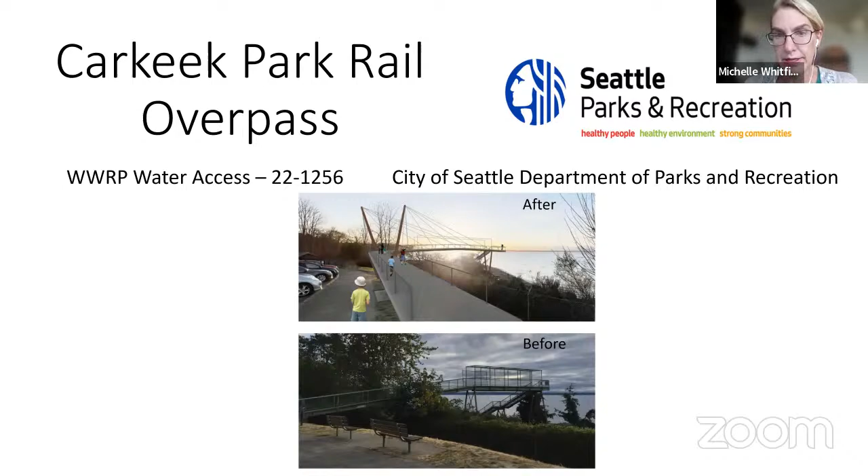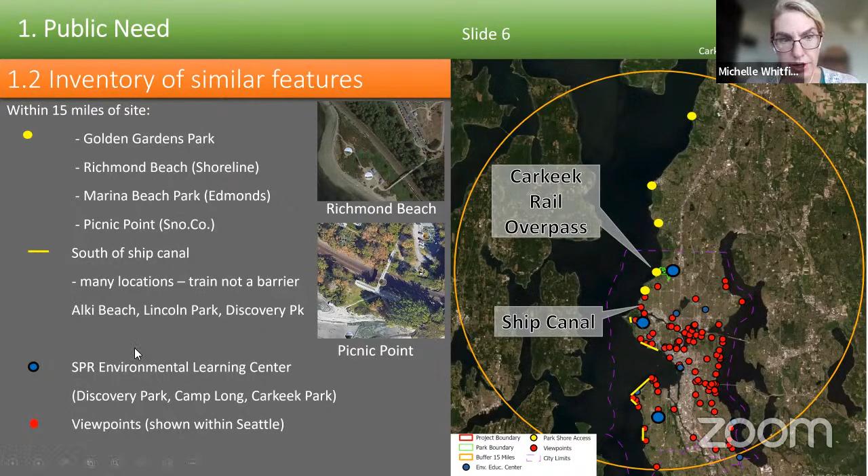In short, there are no other water access points that can compare to this location for the unique learning experience. Within 15 miles of the site, north of the Ship Canal, it is very rare to find water access because of the train, and only 4 locations are available. They're shown here, and there are 2 locations that provide water access with a pedestrian bridge, Richmond Beach and Picnic Point. Since the train is only a barrier to the north, there's more beach access to the south, and viewpoints and learning centers are also shown on this map in blue and red.

Because of its 330-foot width at low tide, the beach at Carkeek Park is wider and higher quality compared to the other safe access locations north. At low tide, an additional 20 acres of tide pools are exposed, and the beach is 1.5 miles long. Kids come here for education and environmental learning through many programs.

This is not a comprehensive list, but among the activities are school programs, which include 480 youth from Title I low-income schools. The park and water access are not in underserved communities, but we believe this park is still worthy of generous RCO support, because while wealthier families can afford to take their children on visits to parks and to see salmon, a good chance for more at-risk children to have the same opportunity is through school programs such as the ones in place here at Carkeek Park. Close into the site, the census tract does have higher income and lower residents of color.

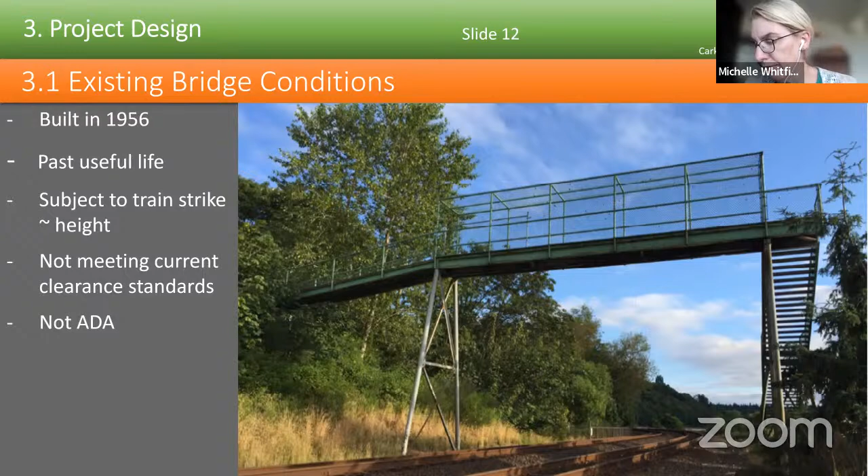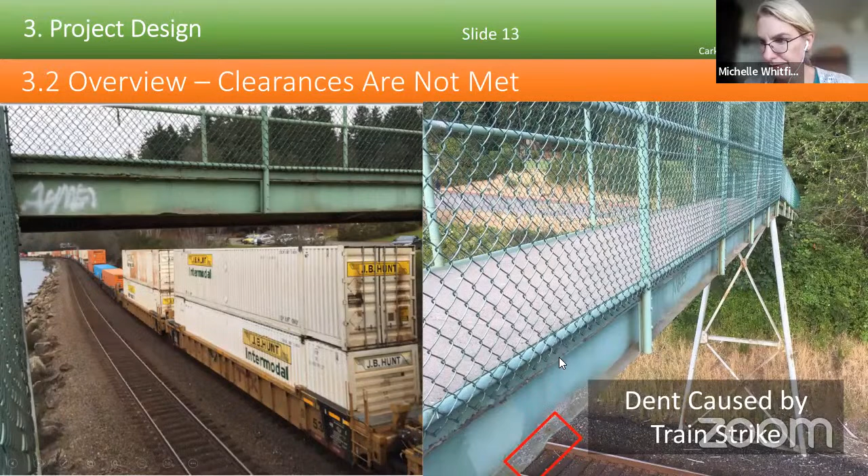Leaking has caused corrosion in many areas of the bridge.

The cable-stayed bridge style was selected for low maintenance costs as compared to the cost of maintaining the existing bridge, in part because the supports will be far enough from the train that they can more easily be serviced. It has a long expected life of 75 years, is cost-effective and fast to construct, and this style bridge allows for a main support to be on the land side, where the land is more stable than the beach side. The open design preserves views of the train and the water.

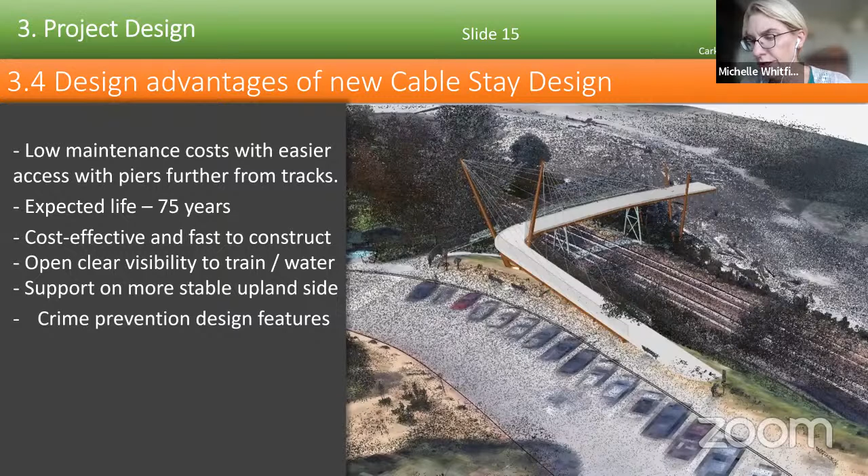The design includes new landscaping and an interpretive plaza. The bridge provides water access to the beach with educational activities: beach combing, swimming, salmon viewing, and counting. The wider bridge will allow the transport of small watercraft.

So once again, to reiterate, without this bridge, there would no longer be a safe connection to the beach and the beach activities.

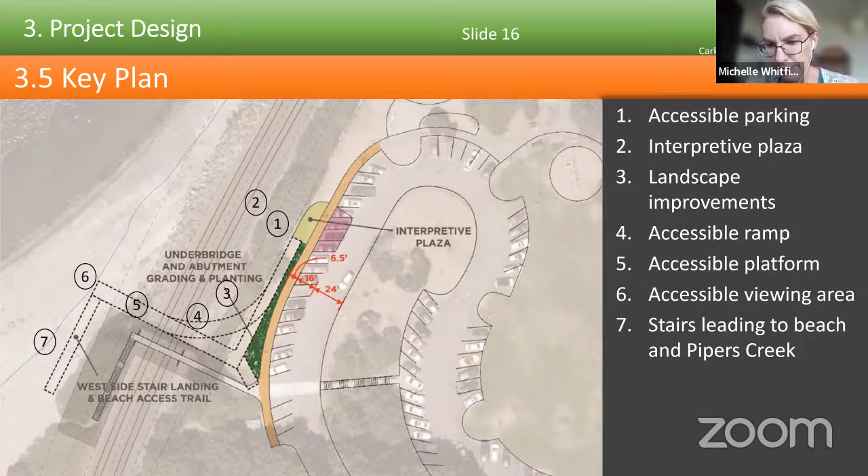The design includes an approach ramp that will be made wider with an accessible slope. The existing bridge, shown to the left, is very steep and not accessible.

The popular landing at the water side is crowded and inaccessible, and will be improved with a designated accessible viewing platform. We studied the possibility of adding a ramp or an elevator to the beach here, but the ramp would have been too long and an elevator would not have been supported by the soils.

The rails are on property owned by BNSF, and an existing easement expires when the current bridge is no longer used, so we will renegotiate the easement from their boilerplate. We've confirmed that BNSF has received our 10% plans, and we have their next steps.

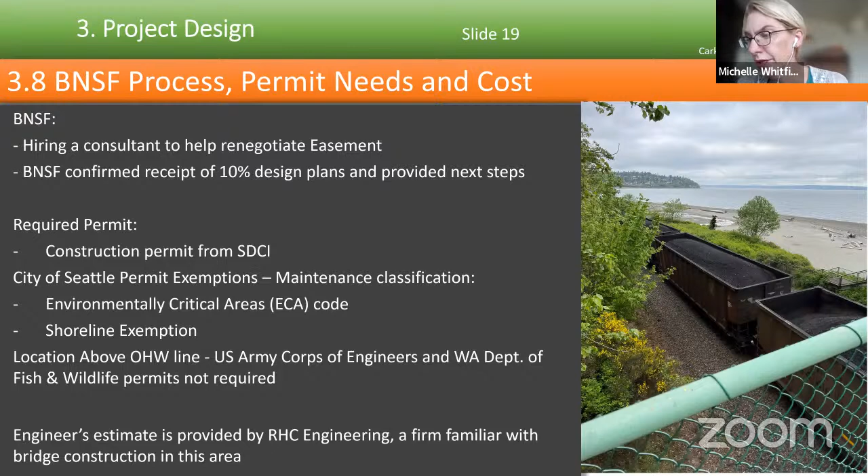On advice from Snohomish County, we are advertising for an experienced consultant to lead the negotiations and advise our property team. Because this is a maintenance project to replace the bridge, we expect to be exempt from shoreline and city environmentally critical areas code. Work will be above the ordinary high water line, so no Army Corps or DFW permits, only a construction permit will be required. The engineer's estimate is provided by RHC Engineering, a firm familiar with bridge construction in this area.

Number 4, sustainability, ecological factors. Stormwater will be managed with green stormwater infrastructure to ensure that no undue burden is placed on the aquatic system. New plantings will help improve air quality, and the area of impact is minimal.

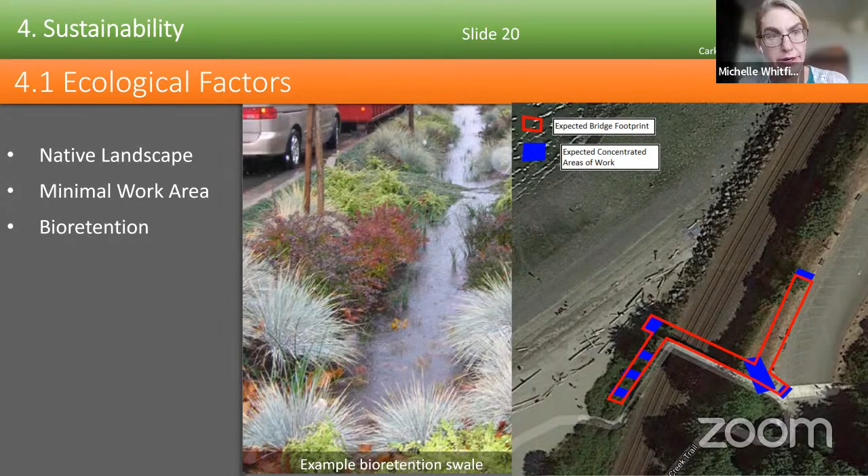Social factors: the site is connected by multiple modes of transportation. The educational experience of studying the salmon life cycle and being able to see the point of exit by crossing the bridge to get to the location where Carkeek Park meets Puget Sound reaches all public school kids once, during 4th or 5th grade, therefore making society as a whole more environmentally aware. This is through the Salmon in the Schools program.

Economic factors involve longer lifespan, lower maintenance costs. SPR is committed to long-term maintenance of the bridge in the form of resources, equipment, and staff. The Carkeek Park Advisory Council, along with several other local organizations, including Carkeek Stars, are among the groups that contribute thousands of volunteer hours to support this park.

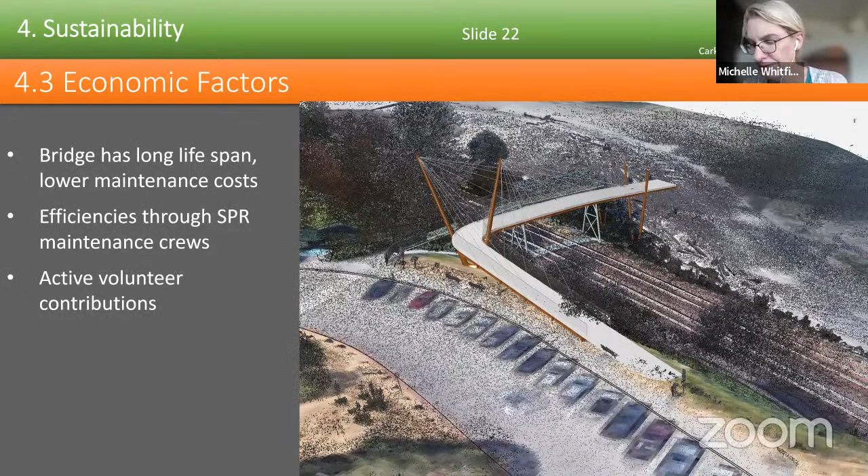Site suitability, number 5. The beach presents challenges for construction. High tides may get even higher with potential to intermittently submerge supports. The soil is soft, and the area is also subject to strikes by beach debris.

So this bridge design allows for a main footing on the land side to avoid the potential for beach settling by limiting the load on the beach side. The proposal conforms to BNSF design recommendations for vertical and lateral clearances.

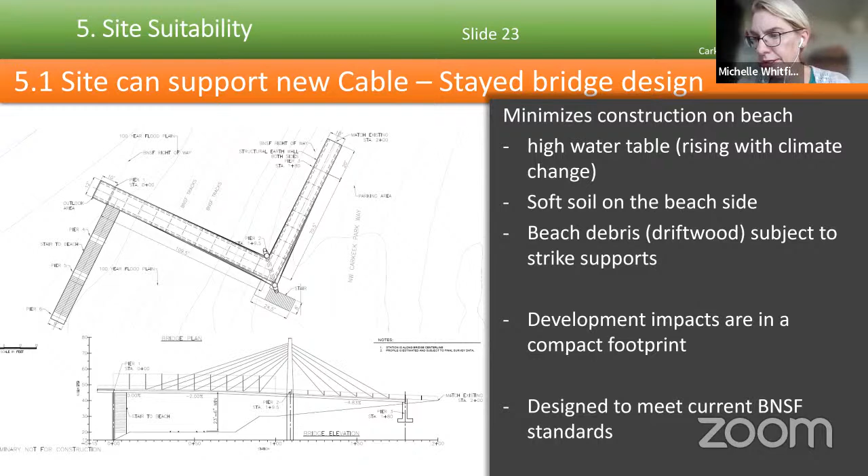And the recreation elements that this bridge provides are largely already in place and do not need to be reinitiated. This is the access to the beach that would go away without a safe crossing, which this bridge provides.

Expansion or renovation, number 6. The new bridge will provide expanded interpretive signage, more use of the beach for watercraft, expanded accessibility where there was none, and expanded clearances to meet BNSF standards.

Number 7, diversity of recreation uses. The project access to the beach provides viewing trains from the bridge, naturalist-led hikes, tide pool viewing, beach and salmon education, night hikes, small boat use, beachcombing, and picnicking. These are all activities that the bridge connects to the beach, so without this bridge, these activities would no longer be accessible from Carkeek Park safely.

Scheduled trips to the beach can have up to 150 people at one time, and the wider bridge will allow the water to be activated through small craft.

Number 8, project support. Many groups are currently working in this area and fully support continued beach access, as shown by the 8 letters of support that this project received. Future outreach will focus on aesthetic and interpretive aspects of the bridge.

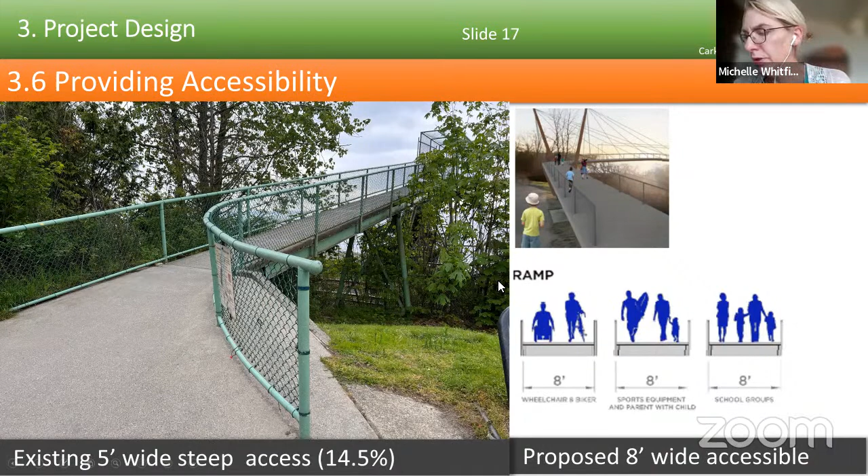The new bridge will have some new interpretive signage, so that's an expansion. There's more use of the beach for watercraft, it's assumed that the bridge will allow you to carry some small watercraft across, that's an expansion. The existing bridge is not accessible, so this one will be accessible up to the viewing platform. And there are expanded clearances to meet the BNSF standards, they'll be taller and the footings will be wider.

Okay great, I was busy with the other criteria when that went through. Yeah, quickly so, I kind of had to speed up a little bit. Oh my, apologies. No problem, thank you. Thank you, David.

And then Sarah, our last question. Michelle, Sarah at the City of Lynnwood. I'm actually interested in your cost efficiency. As you mentioned, you have volunteer efforts, but you didn't give any particulars. Do you have an existing volunteer program? Do you know how many hours a year and what it is that they work on?

Yes, I do. We have an existing volunteer program with Seattle Parks and Recreation, and over the course of every year, the volunteers contribute. I do have some statistics, I'm actually pulling that up. I don't know if we have enough time. It's churning.

If Mo's here, he might have that information right, I don't have it right in front of me. I know that they support over $1.5 million worth of support of our parks. We have thousands of people that volunteer, both in Carkeek because it is a destination park, but in other parks throughout the city. And so we have a very formal process where you can register for ongoing support to volunteer, or one-off projects, we'll often have like a trail maintenance project that somebody can register for. And then we have lots of ad hoc groups that aren't necessarily registered as volunteers, but they provide lots of volunteer support. This is a big park for that, in large part because of all the school programs that happen there. So we get lots of volunteer support that is not actually calculated here. Sorry, I don't have the exact numbers in front of me.

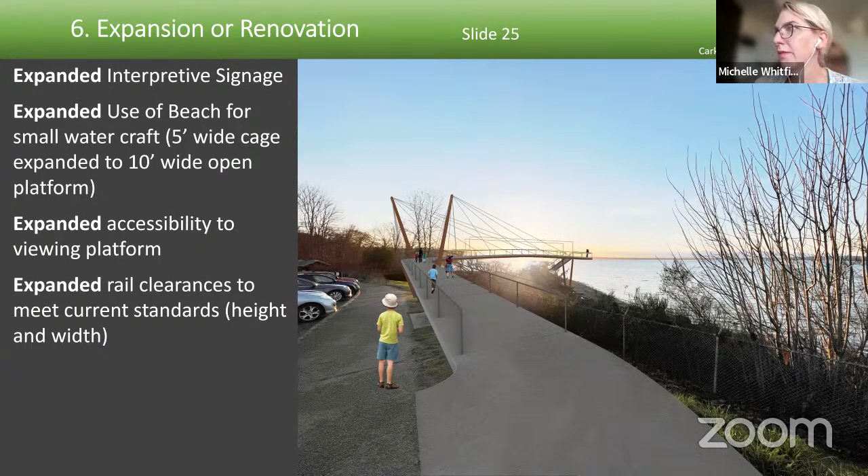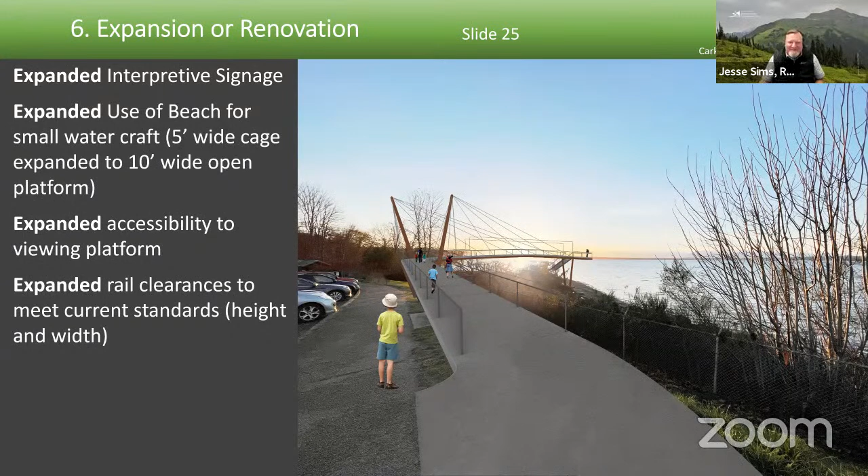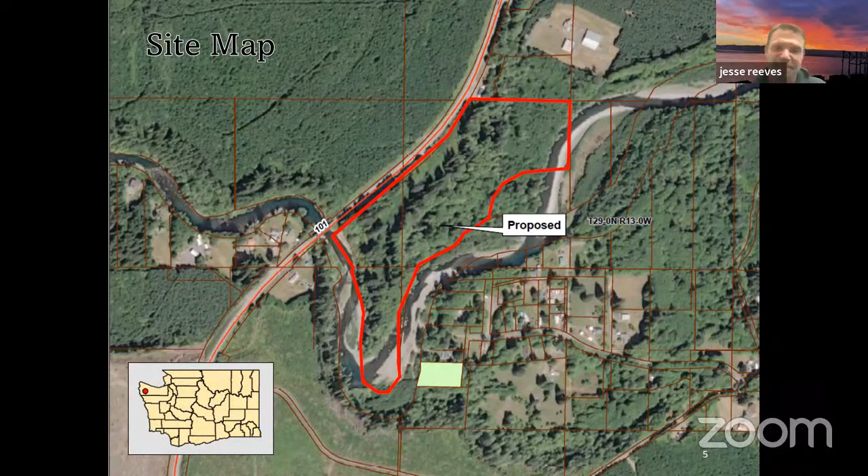This property not only lets people take out before there's some technical water which is not easily navigated by your average oarsmen, but also can be very difficult even for very experienced boaters. That same set of technical water is very popular amongst rafters, boaters, and whitewater enthusiasts. So this site is important for a couple of different reasons, not just for the fishing community, but for people who want to exit the river safely and people who want to enter the river just for what the river offers water-wise below this access.

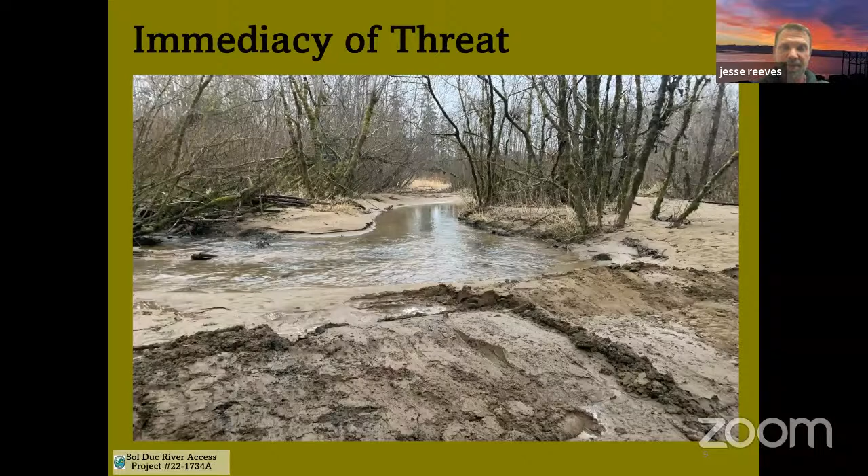Site suitability - this property is already ready for its intended use. There's paved access immediately off of Highway 101 to a maintained gravel road, which you can see. There's more than enough parking on the river bar and above to accommodate several vehicles, trucks, and trailers. There's over 1,000 feet of river bank access for numerous types of recreation aside from just fishing, but there's also no real need at this point for any type of infrastructure besides sign standards and a kiosk for information, maybe regulatory rules and such.

Portable restrooms would be brought in to accommodate those, and potentially a permanent restroom if that was determined to be needed in the future. This site also would fit right in with our current maintenance structure that exists in the area, with several sites in the immediate vicinity, so this would be easily maintained.

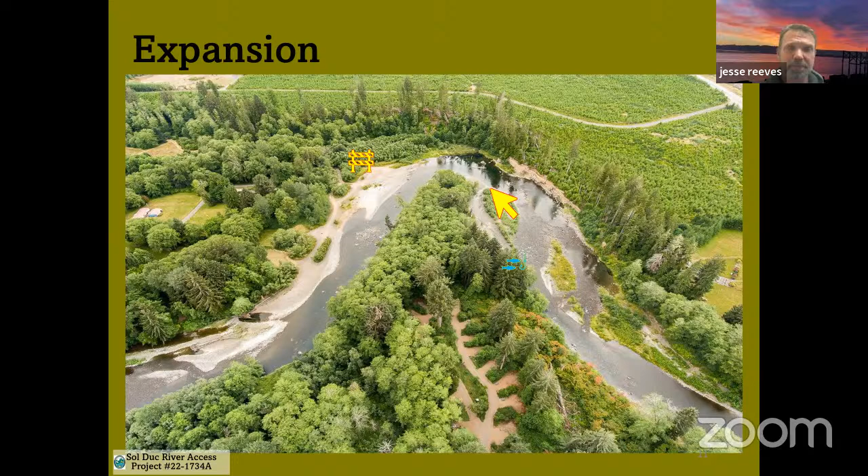We have a lot of support from the local communities, several fishing groups, the city of Forks, Clallam County, just to name a few. And we have several letters of support to add to those.

The cost efficiency of this property would be maintained by DFW's water access staff with infrastructure already in place. The operation and maintenance would be funded by Discover Pass revenue. The contribution of fishing dollars in this area is crucial - once again, this is in the 6th congressional district with over 87,000 anglers who spent over $152 million on fishing-related purchases in Washington state in 2018.

The mentioned property could provide a variety of opportunities for recreation, but also the community as a whole, and WDFW and other agencies for research, and just based on its location and what the property has to add with no additional cost. It's there and ready for use, but also ready to be used for other things aside from recreation.

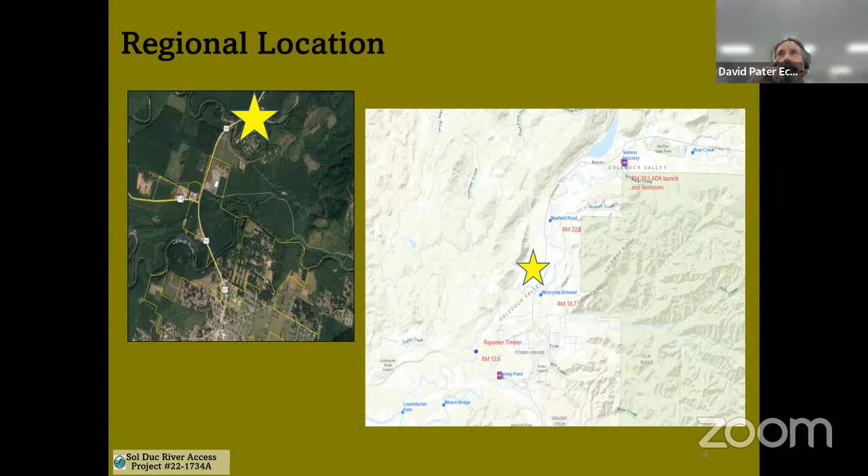I'd like to just get a little bit more information about the boat launch on the property. You showed a map earlier that pointed to a location. But that wasn't the one, I think it was further down. There should be two of them, and then in the very last slide it shows it again. Yeah, that might be it. There we go, you just passed it. There you go, no, new launch.

So this is real confusing to me. So the new launch is on the sort of peninsula of land. You're pointing, this arrow, but it looks like there's a side channel. I'm just not seeing how accessible it is, and maybe we're not seeing everything from this aerial, obviously.

To the right of the peninsula, on the opposite bank of the river, you see the opening that's there. It's not really a side channel, that's a gravel bar. But the actual launch is at the very tip of that peninsula, right at the end of that gravel bar.

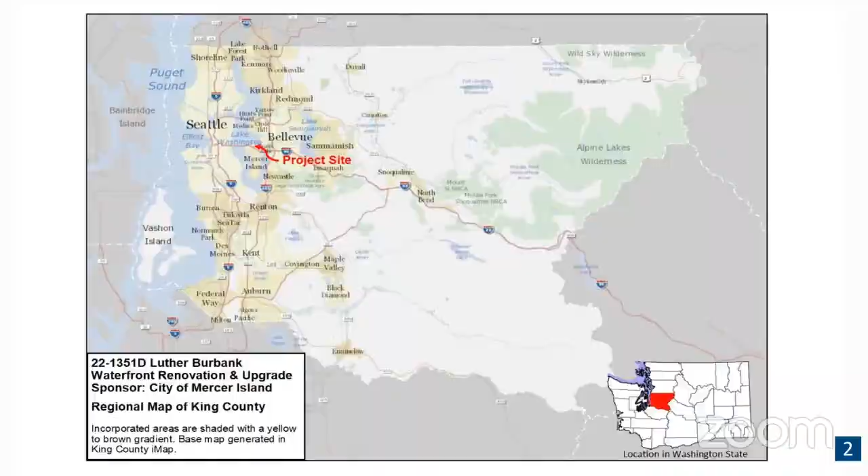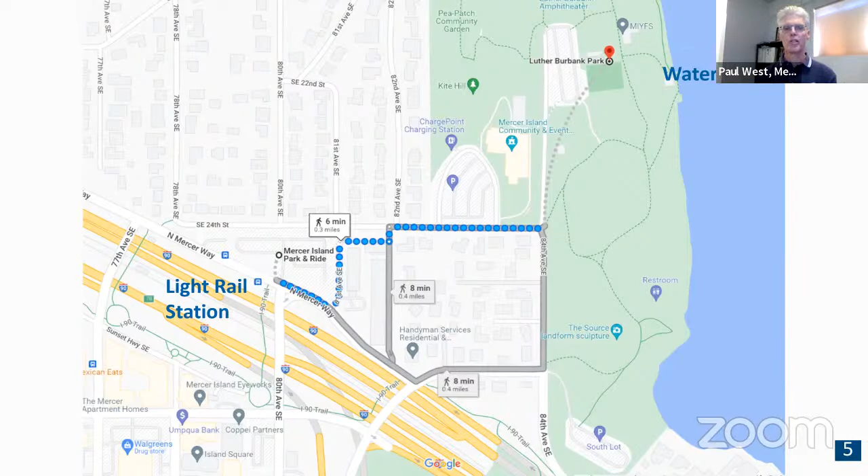The city of Mercer Island is within Lake Washington, King County. Our project is within Luther Burbank Park on the north end of Mercer Island. The site is located just off I-90 between Seattle and Bellevue. The project is on the shoreline of Lake Washington. The current boating facility was developed in 1974. It includes fixed pier docks, a pedestrian plaza, a storage building, and a historic steam plant and restrooms. This project is a 7-minute walk from a Sound Transit light rail station. Starting in 2024, this project will cover a service area containing 2.9 million people. The facility is 50 years old. Rot has overtaken the docks, and the plaza paving is failing.

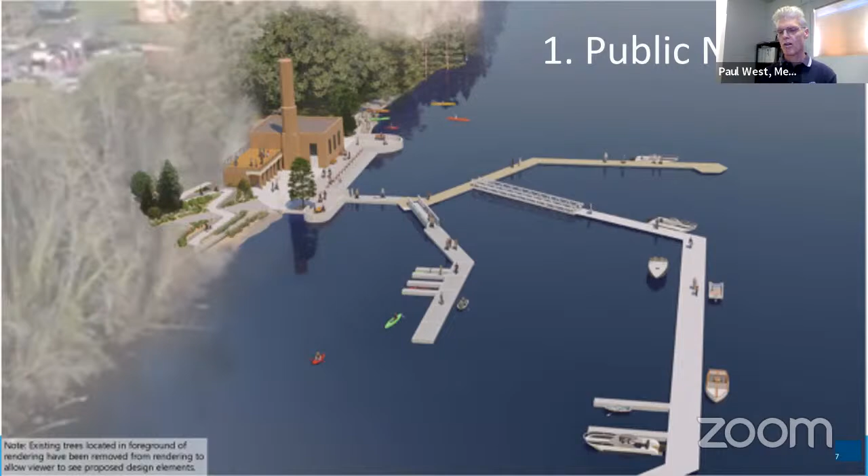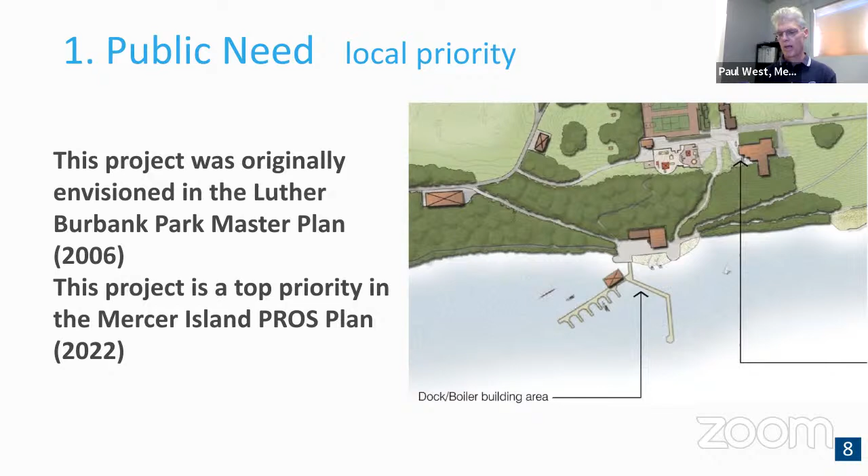Criteria 1 is public need. This project will create a gathering space for multi-use aquatic recreation. While there are many water access points on Lake Washington, there are few locations that bring together the range of desires for shoreline access. This project gives everyone from die-hard boaters to those who literally just want to get their feet wet a way to participate. This project was originally envisioned in the 2006 Luther Burbank Park Master Plan. The project is a top priority in the 2022 Mercer Island PROS Plan. The design of this project achieves SCORP priorities for equity, youth, and sustaining our legacy.

This program hits on 4 of the 6 recommendations of the state boating programs plan. In our 2018 demand study, it showed the expected growth in small boat use would not be met by the fixed pier docks. Then the pandemic hit. Paddle sport growth has been estimated at 30 to 40% since then.

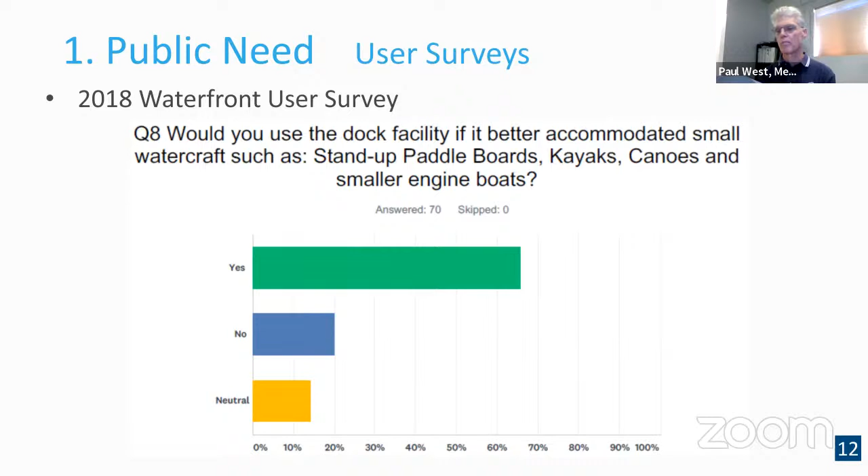Our waterfront user survey found that 65% of respondents said they would use the docks if they better served small boats. In 2020, we conducted a 5-week design open house and presented 3 design alternatives. We received 131 survey responses that showed people wanted more facilities and services for paddlecraft. Our youth boating programs at the site are the most popular summer camps we offer.

Lake Washington has many water access points, but relatively few comparable multi-use sites that could appeal to a broad audience of boaters and non-boaters. We identified 4. We asked: is the site attractive to non-boaters? Are there other things to do in the park? Is it accessible by transit? Is it usable by all classes of boats? Asking these questions, we found that only Gene Coulon Park was comparable to the project we are proposing.

Luther Burbank Park is a regional park. Bellevue College conducted a statistical survey that supports this assertion. It found that 60% of park users were not from Mercer Island. Most park users come on the interstate highways, and in 2024, light rail will be another option. We anticipate an increase in park usage once it opens.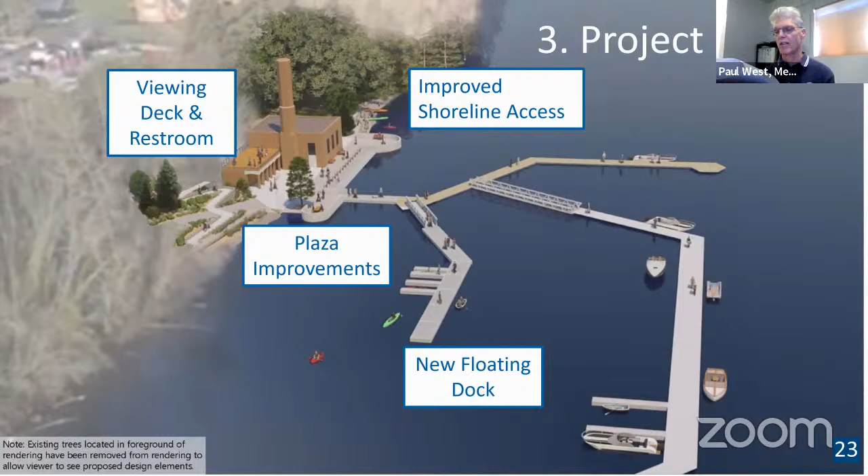Project design. This slide is a rendering of what the new facility would look like. This project would build a new floating dock for non-motorized boats, improve shoreline access with an expanded beach and overwater platform, and provide additional water access with plaza improvements and a new viewing platform on top of the restroom annex. This project is part of a larger comprehensive initiative for the entire waterfront area. The related projects are the small powerboat dock, the large powerboat pier, and the steam plant stabilization.

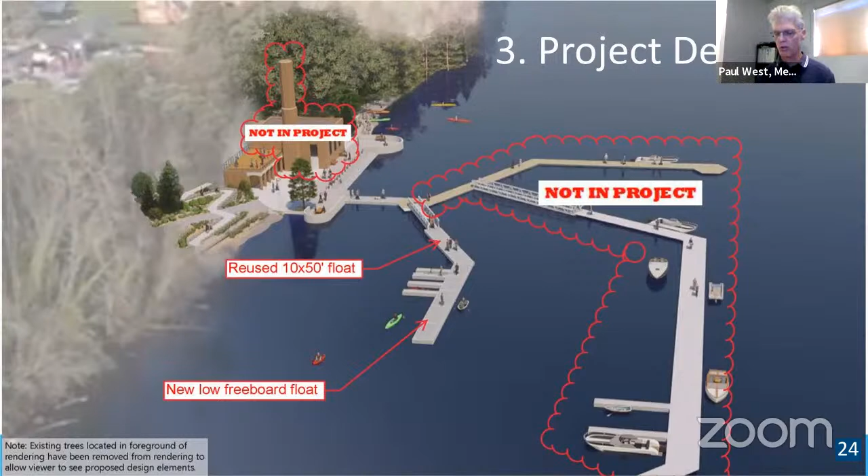We have given particular attention to designing these features to separate various boating and non-boating uses to reduce user conflicts. The viewing deck, overwater platform, and non-motorized dock provide new recreational experiences. The non-motorized dock will replace a fixed pier. It will reuse an existing float and add a new low freeboard float for paddlecraft. Finger docks will help paddlers load and unload. The outer dock provides wave attenuation.

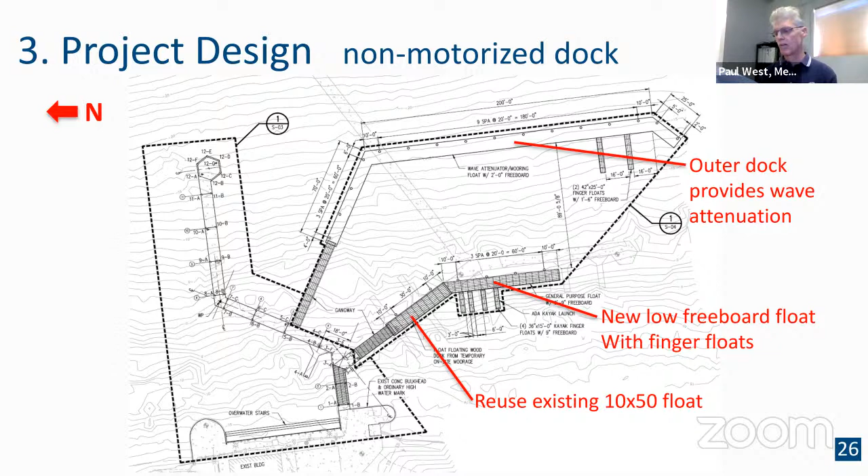Lake Washington has changed in the last 10 years with the advent of wake surfing boats. The large wakes these boats generate create a hazard for people using small craft. This wave attenuation dock addresses this.

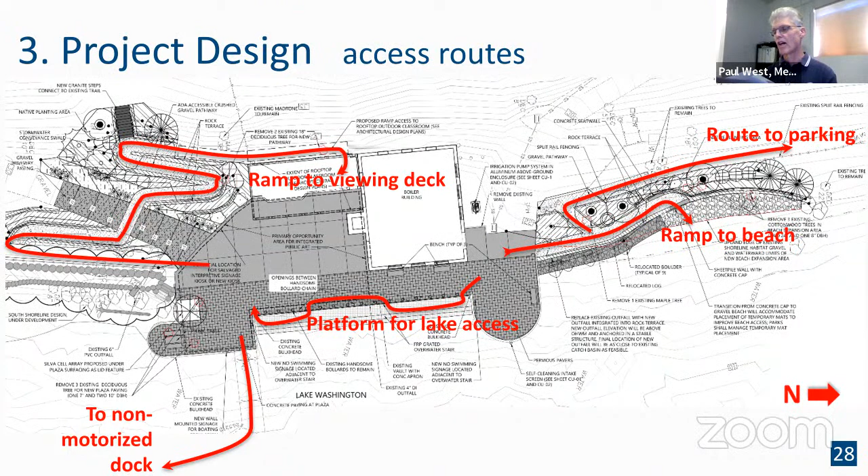The project routes create 4 new ADA accessible elements: the viewing deck, the overwater platform, the non-motorized dock, and the cobble beach. The non-motorized dock will also feature an easy launch ramp for users who prefer to enter their boat before it is floating.

Underlying all these improvements will be a drainage system that protects the improvements. The original facility did not have a drainage system. The plaza paving and restroom annex have suffered water damage as a result. This system will install drain lines to support the new improvements. It will capture runoff from the plaza in permeable pavers and conduct it through a biofiltration system before it goes into Lake Washington. With this, the plaza hardscape provides some of the benefits of a naturally vegetated shoreline.

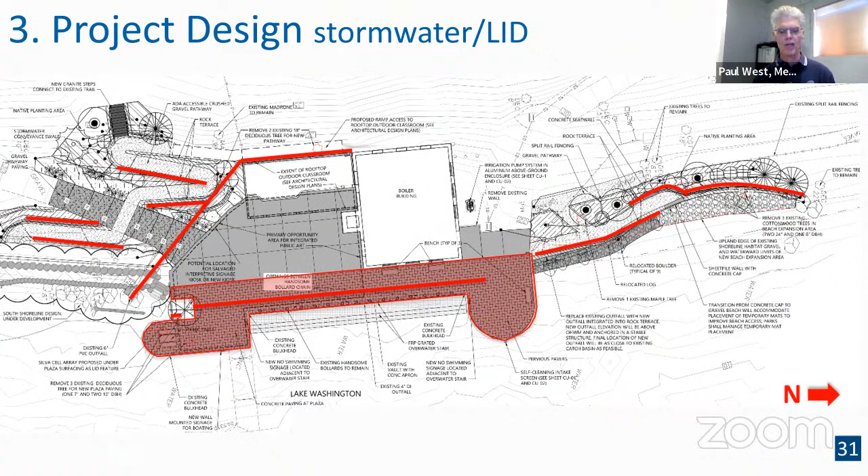An element unique to this project is the proposed overwater platform. Current use of the site demonstrates the strong demand for this type of recreation. There would be a 4-foot wide platform and 2 risers attached to the bulkhead. The bottom step would be just above ordinary high water, which would allow waves to flow across it. This will allow people to dip their feet into the water during summer months. This feature promises to be a gathering spot for everyone, especially those less comfortable with getting into the water, giving them a way to interact with the lake.

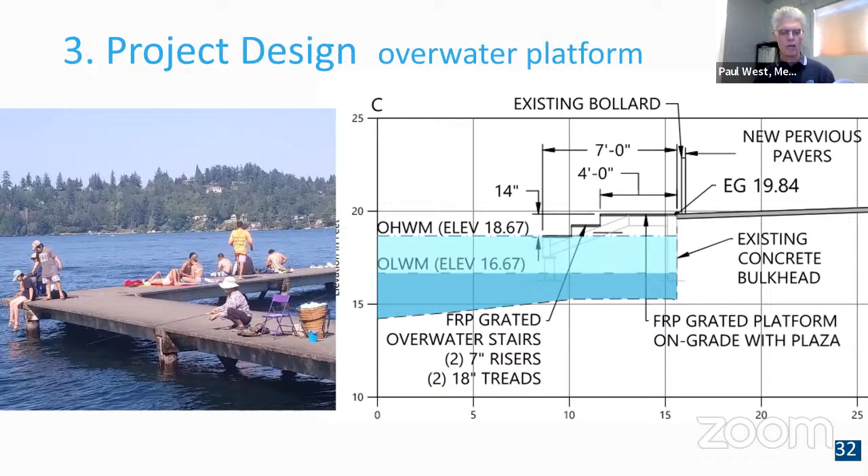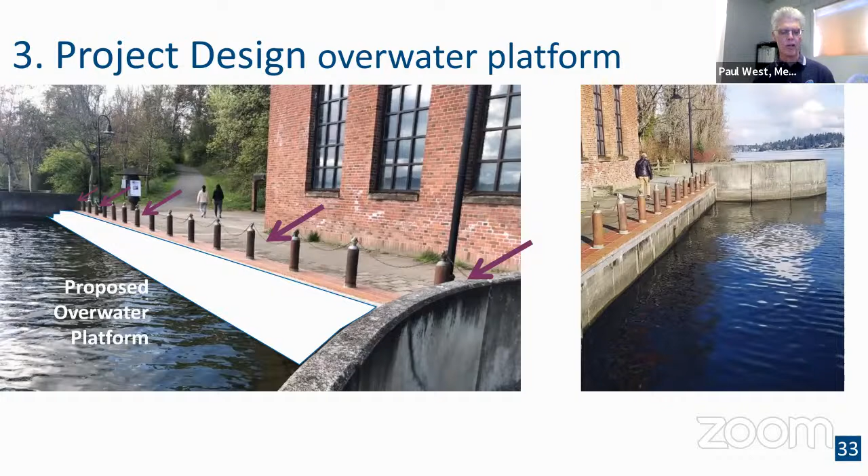Because the overwater platform is a unique feature, we are having the design reviewed for safety and usability by a qualified aquatic recreation consultant. A new viewing deck on top of the existing restrooms would provide views of waterfront activity and be a place for boating classes to gather away from the plaza traffic. Seating would be flexible based on seasonal need. This project includes renovations of the restrooms, plaza, and cobble beach.

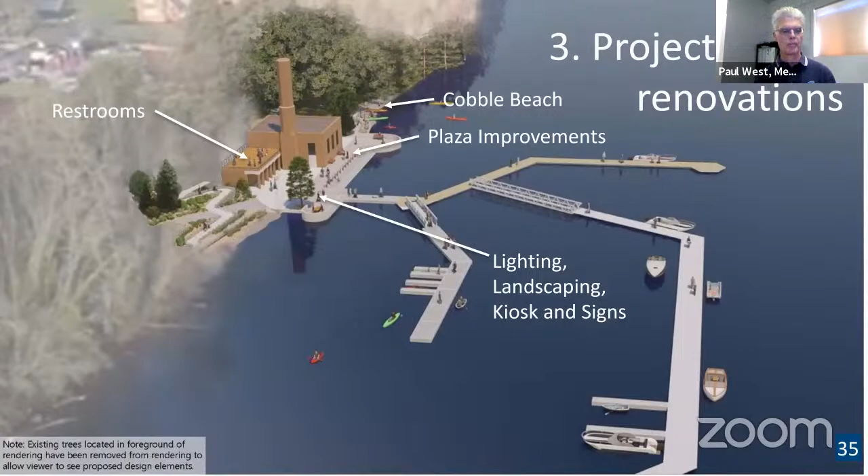The existing cobble beach will be widened. Currently, it is only 5 feet wide during the summer high water period. Widening it would give pedestrians a place to access water and paddlers a place to land.

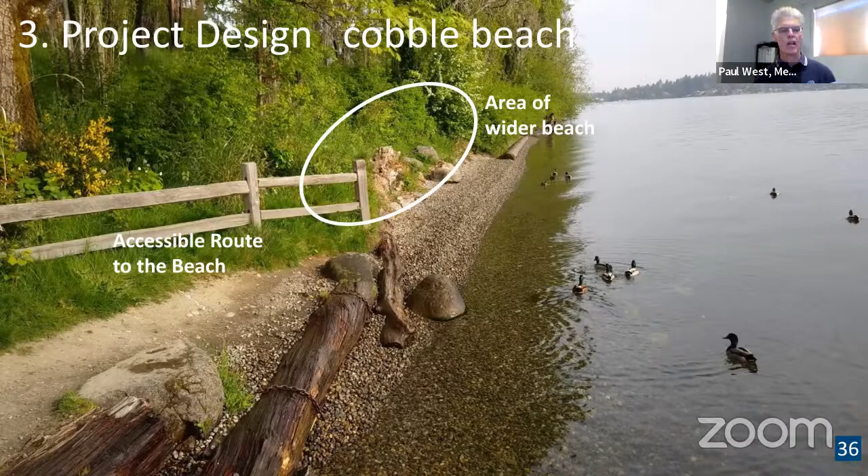Sustainability. The overwater stairs impact the nearshore environment even with grated decking. You can see the lake bottom in this reach has been heavily disturbed. It is expected that migratory fish stay offshore in this reach. The overwater coverage in this reach has less impact on fish habitat.

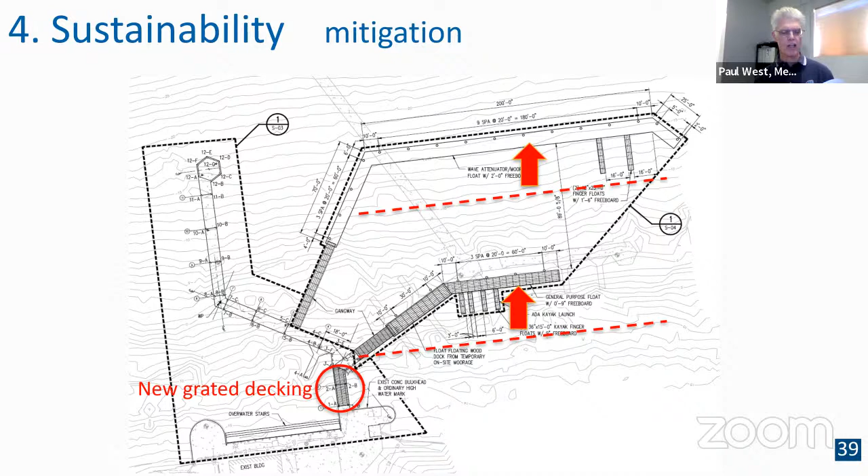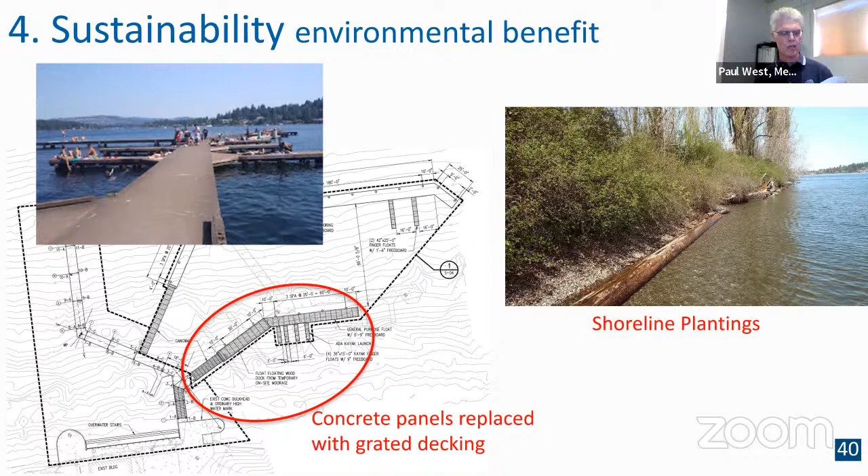Based on regulatory agency review, the docks have been moved further offshore and the closest section will get grated decking. The critical areas study has determined that there is no net loss of biological function from this project. The non-motorized dock will replace the existing concrete deck with a grated deck. Shoreline plantings will provide shade and terrestrial habitat.

This project removes 74 creosote pilings and replaces them with 29 steel pilings.

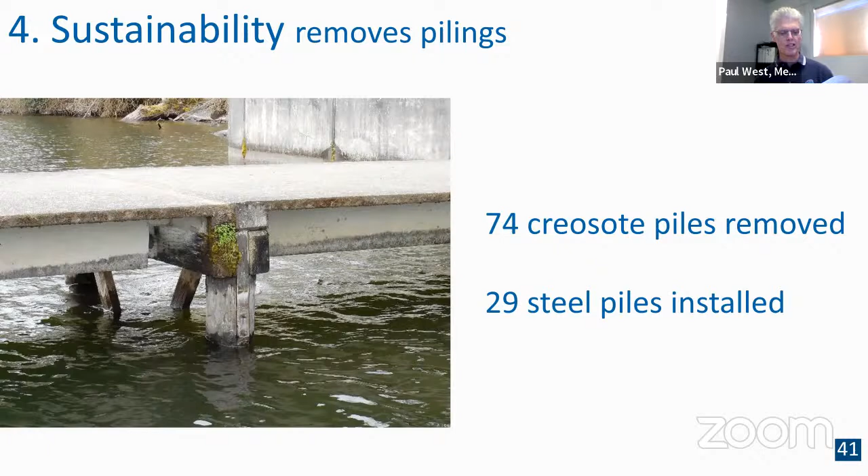Throughout this project, our programs and posted materials will foster public awareness of the aquatic lands and water quality, especially through our youth programs. This project includes low-impact development features.

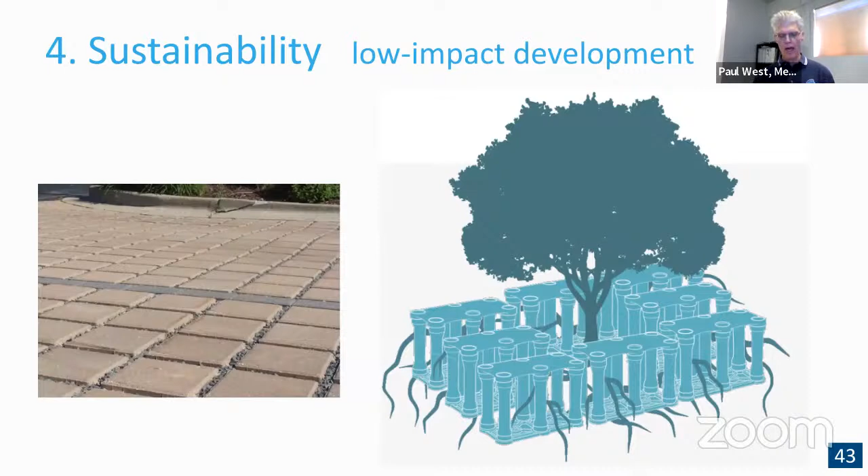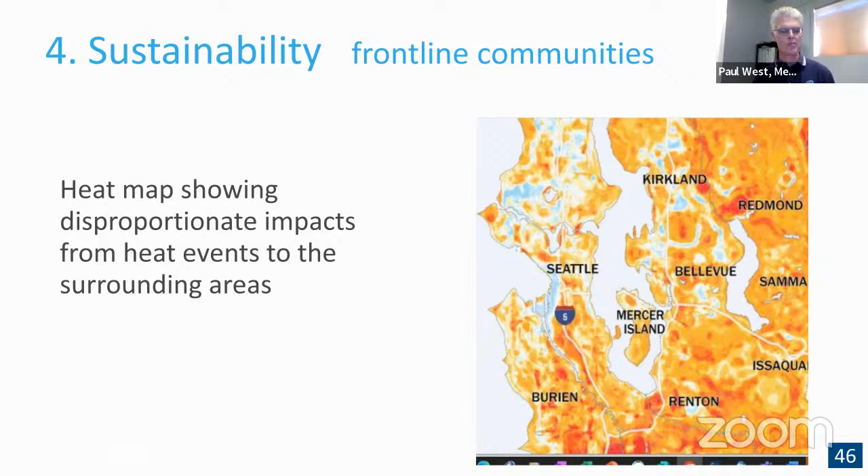This project will be accessible by light rail. The site is next to the Mountains to Sound Regional Trail. Water access at this site provides a cooling environment that is accessible to frontline communities affected by climate extremes.

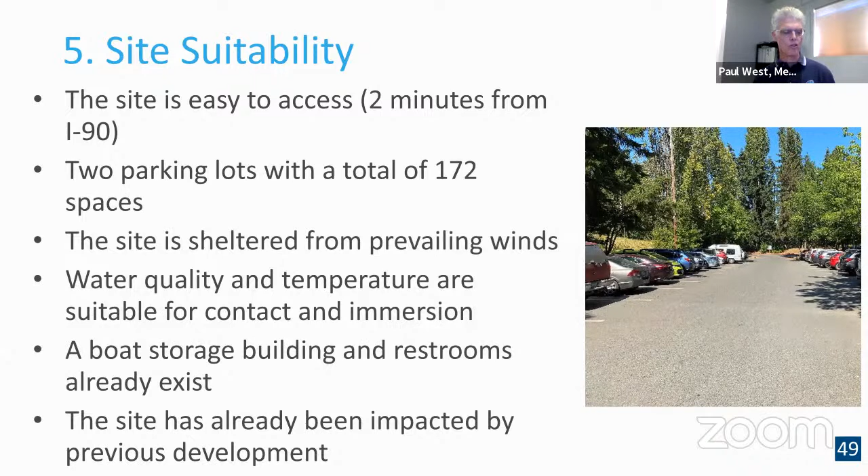The site is easy to access by car or transit. The site is sheltered from prevailing winds. Water quality and temperature are suitable for contact and immersion. Boating facilities already exist here.

Expansion. This project expands an existing facility. It provides over 3,100 square feet of new facilities that do not currently exist. In addition, it provides 365 linear feet of new access routes.

Diversity of recreational uses. The city's comprehensive waterfront initiative will provide for a range of water-based uses. Boaters and non-boaters have a place here. That project connects to a 55-acre park with many additional recreation options in the park, such as picnicking, playgrounds, tennis, pickleball, dog run, amphitheater, swim beach, and miles of trails.

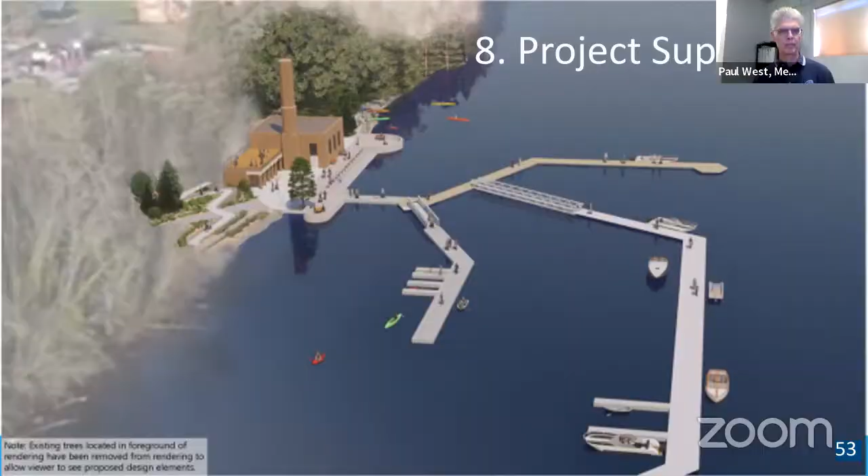Project support. The project has been engaging the public in scoping and design since 2018. The project has maintained an interactive web page where people can find project information and provide input at any time.

Starting in 2020, the city ran a 2-year campaign of public engagement in the design process, culminating in the city council approving a 30% design in March of 2022. This project has received support letters from 12 organizations and individuals.

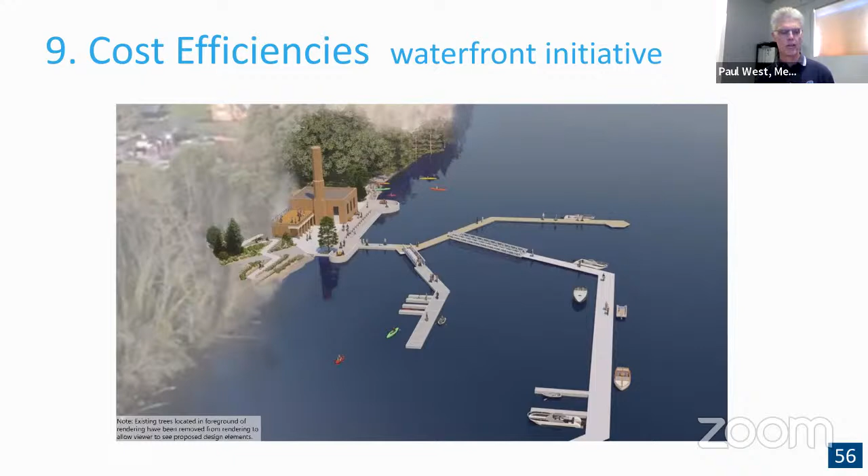Cost efficiencies. This project is part of the city's comprehensive waterfront initiative. There are economies of scale in redoing the entire site as a single project. The 3 major renovation elements in the project are cost efficiencies over building new facilities.

We are reusing an existing float which saves money and reduces waste. The Waterfront Initiative has secured 4 grants to date. It may receive up to 10 grants in total.

That is a quick run through of the criteria. I'm happy to answer questions.

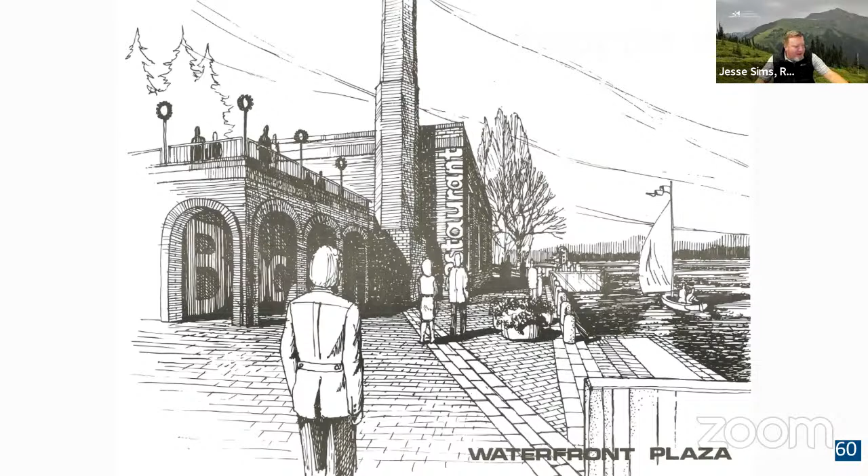Well, thank you very much, Paul. You even had a little time to spare there, so congratulations. I'd like to now open it up to the evaluation committee members for any questions or comments or anything you need clarified. And it looks like Sarah, you have your hand up, so go ahead.

You're muted, Sarah. Sarah, you're muted. I'm so sorry.

Hi, Paul. Sarah from the city of Lynnwood. You mentioned that there's a wave attenuation benefit from the outer dock, but that the outer dock is part of a separate project. Can you clarify that relationship?

Yes, that's a good question. The outer dock is a dock that is going to be for small motorized boats up to 26 feet. We're hoping for boating facilities program funding to help with that. So there is going to be proration of that facility between the boating facilities project and this project, and that's been figured into the budget of this project.

Because there is benefit, the wave attenuation is the proration of the wave attenuation aspect only. I could go into how we prorated it, but it's a little complicated.

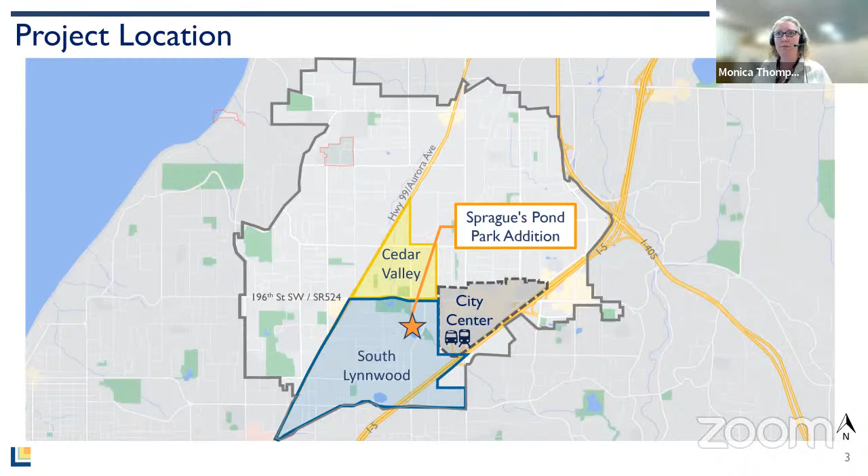on the eastern shore of Sprague's Pond. On the west side is Sprague's Pond Mini Park, outlined in green. Until this year, the mini park has been classified as mini because it was just 0.9 acres. Earlier this year, the city acquired the adjacent 1.6-acre parcel, shown in yellow, which includes the shoreline and open water area. It is now a 2.5-acre park with a playground, path, sloped lawn, and 9-stall parking lot.

Now, our goal is to meet growing population and recreation demands by further expanding the park and water access.

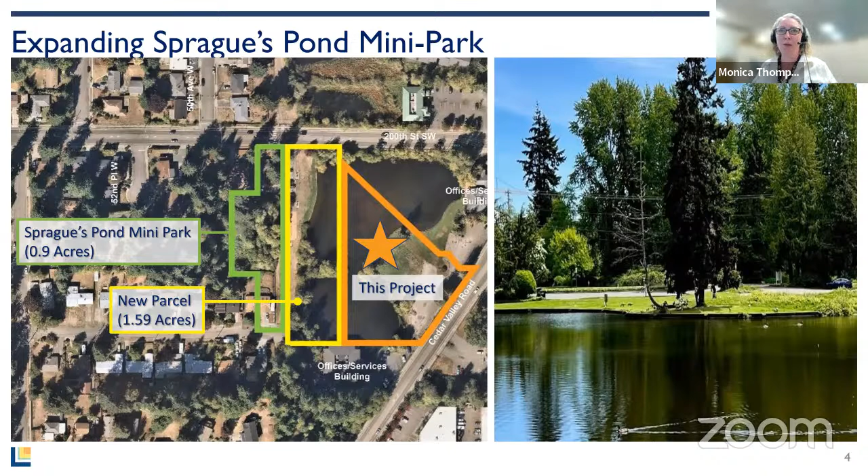Public need: despite its small size, Sprague's Pond Mini Park plays an outsized role in the community because it provides rare water access in a central location surrounded by commercial and multifamily density. The South Lynnwood neighborhood contains 20% of the city's population at a higher density than the rest of the city.

Our growth rate is 2,000 new residents annually, but is projected to increase. With Link Light Rail service opening in 2024, the adjacent city center district is transforming from car-oriented strip malls into transit-oriented mixed-use developments. This project is less than a quarter mile and within a 10-minute walk from the core via Scriber Creek Trail, a road-separated pedestrian and bicycle trail.

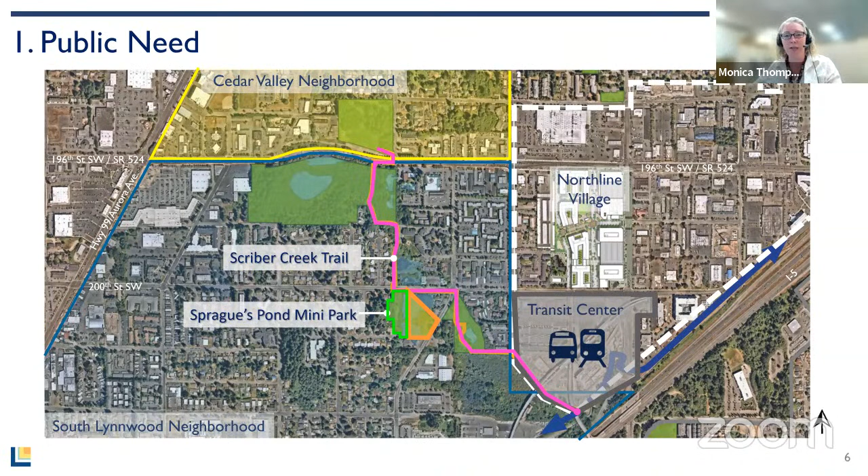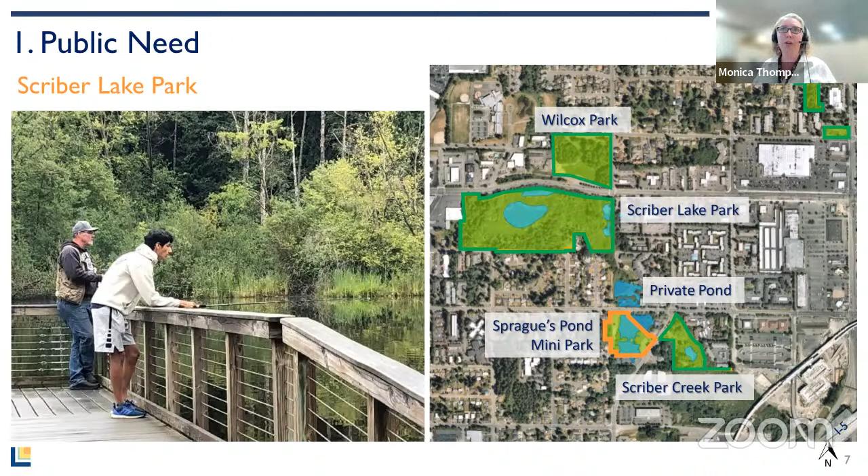We need to invest in this rare opportunity in advance of this growth. Sprague's Pond is one of only two publicly available water bodies in the city. Scriber Lake, the other public water body, is very popular for urban fishing and nature viewing. Residents throughout South Lynnwood and the city regularly come here to fish. However, the dock is down a soft surface trail that frequently floods and is not ADA accessible.

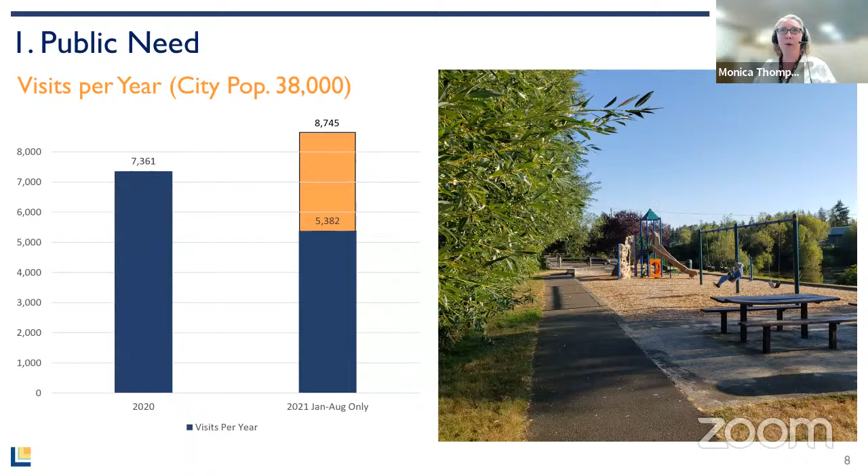According to cell phone data, Sprague's Pond Mini Park hosted 7,300 visits in 2020 and an estimated 8,700 visits in 2021. With only 9 parking spaces, its use is limited to primarily serving residents within walking distance.

The mini park's 7,000 square foot lawn has a steep grade of 15 to 20% down to the water, making it unstable for fishing for able-bodied persons and ADA access infeasible. It's also slippery, especially after it's rained.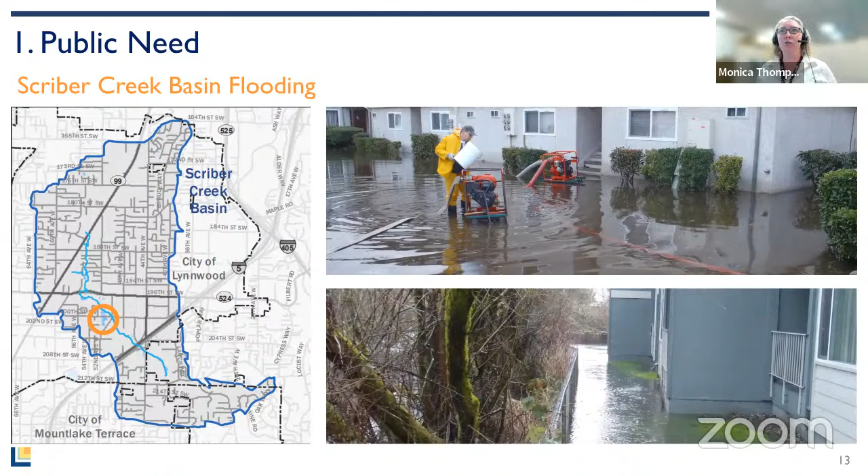Sprague's Pond is within the Scriber Creek Basin of the Swamp Creek watershed in the Lake Washington Cedar Sammamish Watershed Resource Inventory Area 8. Scriber Creek is the main drainage basin in Lynnwood and has experienced repeated and significant flooding for several decades. Sprague's Pond is a Category 3 wetland with moderate functionality because it has been disturbed by its urban surroundings. With restoration, the pond could add water storage capacity to the Scriber Creek watershed, which would help mitigate urban flooding. To do so, the city needs greater access to the shores of Sprague's Pond for future restoration.

Our project meets 4 out of 5 metrics of underserved populations. The median household income is below the state's average. Racial and linguistic diversity with a persons of color population is almost double the state's. The disabled persons population is above the state's, and why immediate access to the pond is an important benefit of this project. Residents of the nearby senior housing complex have a variety of mobility challenges. BMI rates are also above the state's, and the mortality rate is below the state's.

About 2,600 South Lynnwood residents live within a 10-minute walk, of which 26% are Hispanic, 21% are Asian, and 52% of households are low income.

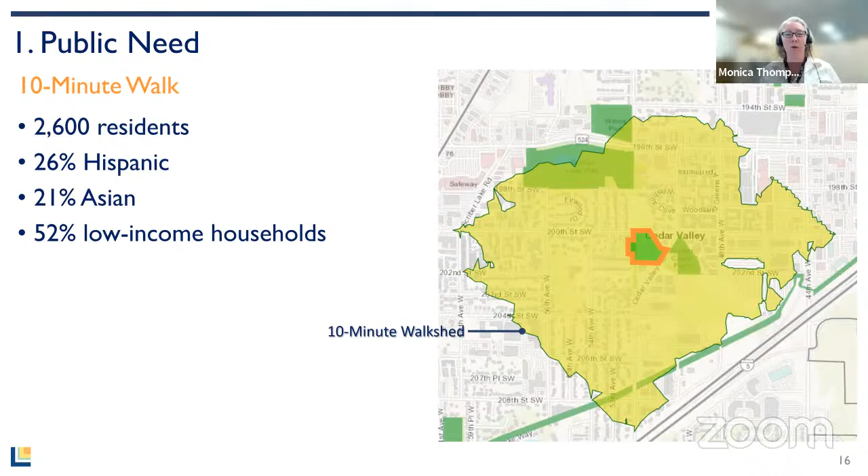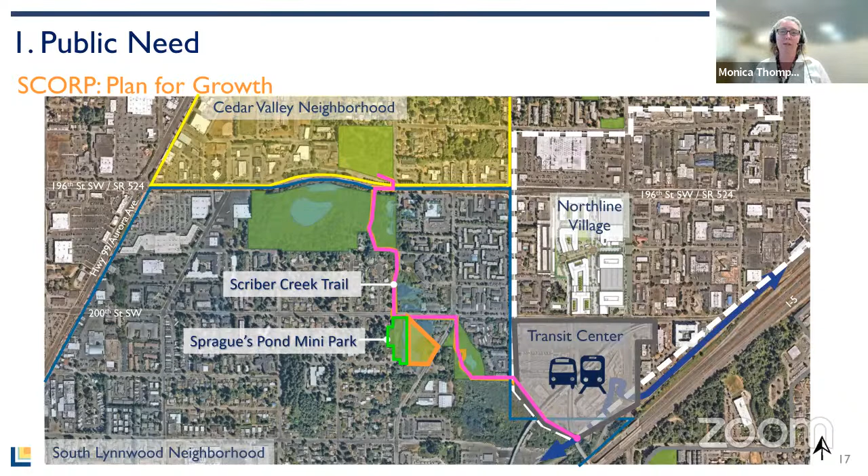We are meeting the statewide comprehensive outdoor recreation plan recommendation to include recreation when planning for growth, given the proximity of the anticipated density from transit-oriented developments due to the new light rail service. Similarly, our 2022 PARC plan update recognized development pressure on available land. This project aligns with our strategic direction to prepare for the future by strategically acquiring additional parklands.

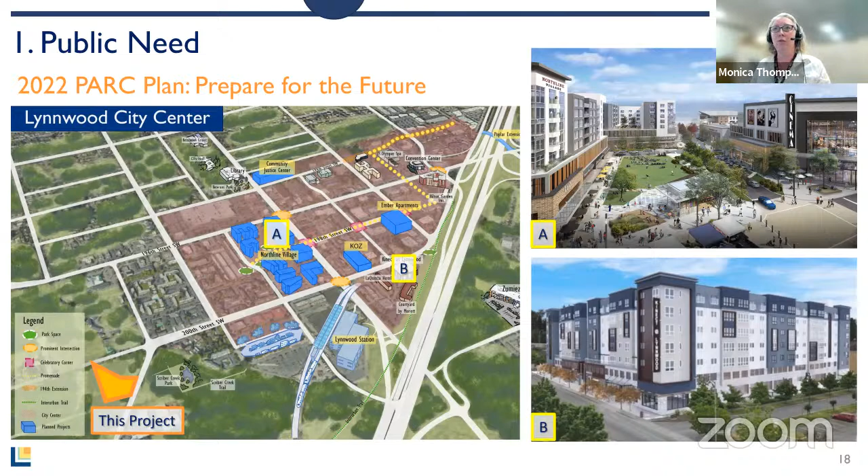Our level of service goal is to provide 3.5 acres per 1,000 residents, which means acquisition is critically important to adequately serve the city's growing population. The project also meets the SCORP priority to improve equity of parks by connecting people to popular activities with a 25% participation rate in freshwater fishing statewide. By acquiring a site already used for fishing, we're providing experiences where people go most.

Our Parks 2021 comprehensive plan names acquiring open space in the Scriber Creek watershed. Our 2022 capital facilities plan also names this project. The project also addresses the community identified vision that residents of all ages have safe places to play and learn in the 2021 South Lynnwood Neighborhood Plan.

Immediacy of threat: we were at risk of losing this property for nature viewing and water access to development. We exercised our purchase and sale agreement and acquired the property on June 23rd with the waiver of retroactivity. As you'll see, this reflected the landowner's urgency.

The landowner was planning to build a new Lynnwood Elks Lodge, an 11,000 square foot commercial office building and entertainment facility. Historically, the site contained a similar office building until it burned down in 2012 and was cleared. The landowner purchased the property in 2016 with the intent to develop.

Situated on a low plateau and with flat topography, scenic views of the pond, existing parking facilities, and similar office buildings adjacent to it, the site is well suited for this building and use.

The landowner had an approved land use permit for their 2-story building overlooking the water and had applied for building permits that were under review.

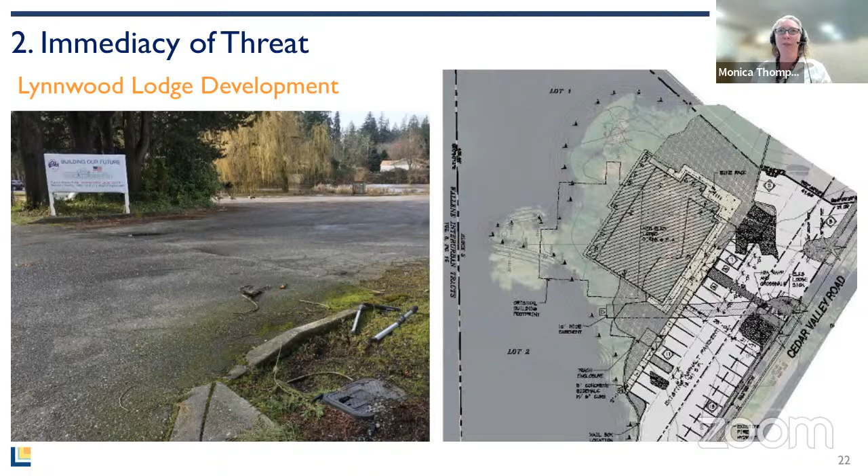Because of a grandfathered status, the development would have been allowed to be built near the shoreline and within the 150-foot wetland buffer, further contributing to degraded water quality. Plus, without this property's shoreline and water access, water quality monitoring and restoration would be more difficult.

However, the landowner encountered unanticipated costs with development and was willing to consider other ideas, including reducing the structure size to a 5,000 square foot 1-story building or selling the property to build at another location. They listed the property for sale in April 2020 for $1.84 million.

If we hadn't acquired the property when we did, the landowner would have begun construction by the end of this year, and our chance to expand public water access would have been lost forever.

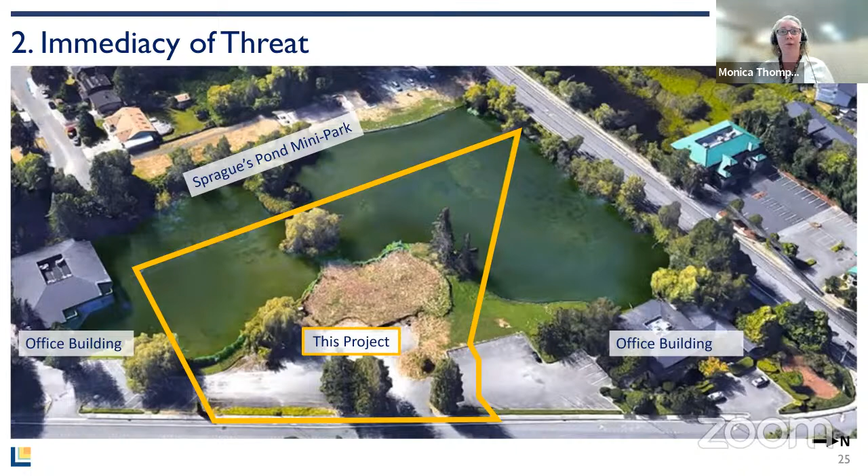The other parcels on the pond to the north and south are less suited for parkland since they both contain large office buildings. Five: site suitability.

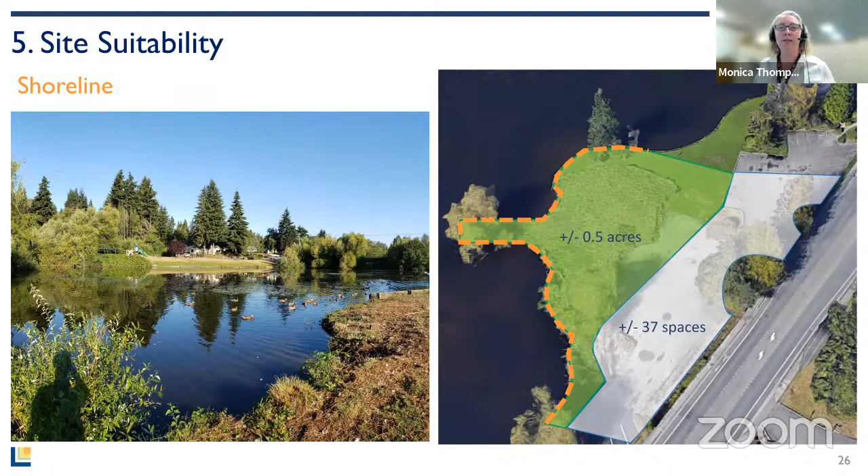With 461 linear feet of shoreline, a flat open lawn, trees, parking lot, and driveway, this parcel is ready to be combined with the existing park to become a destination for urban fishing, nature viewing, picnicking, and passive recreation. The site is ready for visitors from near and far.

The existing parking lot can accommodate up to 37 spots. As I mentioned, the site is near the future light rail station, which connects to the Scriber Creek Trail, a spur off the 18-mile regional interurban trail.

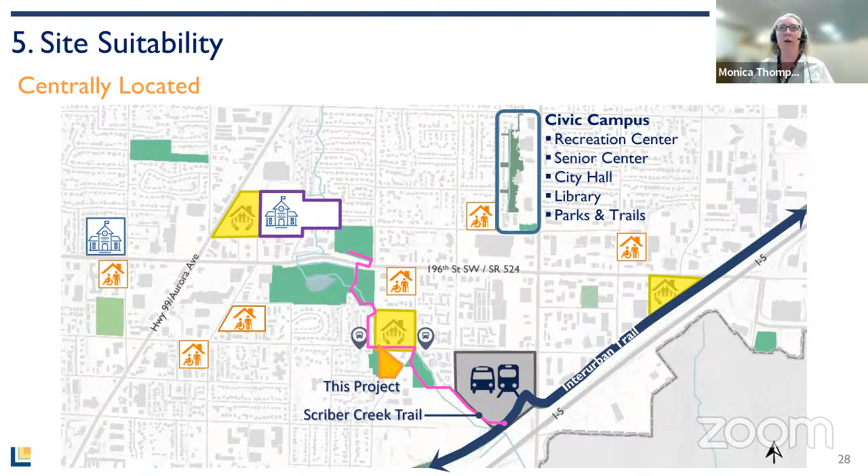Within our densest neighborhood, it's central for people living in low-income housing in yellow and in senior housing in orange. It's also less than 3/4 mile to the Edmonds School District's highest need school in purple, which gives us an opportunity to partner and provide environmental education.

The flat topography, proximity, and length of accessible route to the pond allows easy access for people of all ages and skill levels. The entry is approximately 100 feet from the water, so people won't have to hike to the dock with fishing gear like at Scriber Lake Park. This park will be the only park to offer immediate access to the water and open water views.

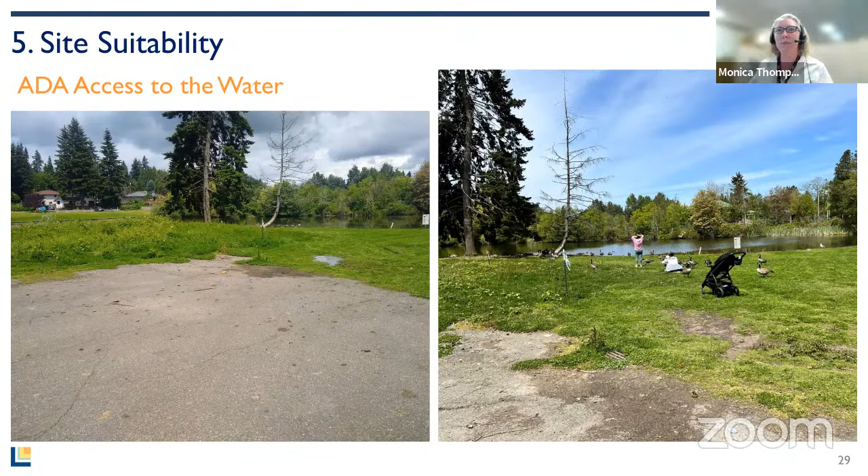Sprague's Pond is a depressional wetland with peat soils and a high water table, with palustrine forested and emergent plant communities like Pacific willow, red alder, and broadleaf cattail. Just under half the site is open water.

The pond is habitat for bass, which the Department of Health lists as safe to eat up to twice a month statewide, and trout, which has no consumption restrictions. In the 50s and 60s, the Sprague family harvested the site's peat soils, thereby creating Sprague's Pond.

The Phase 1 environmental site assessment found no recognized environmental conditions that would present a threat to its use as a park. To open the site, we plan to restripe the parking lot, ensure compliance with ADA standards, develop a long-term maintenance plan, and add a park sign by October.

Our maintenance plan will specify native plantings, pesticide-free lawn care, and a water quality monitoring program. Our long-term vision includes removing excess pavement and planting trees and shrubs in the parking lot to cool the lot and pond, and adding a bridge.

The bridge would serve as an overwater dock for fishing and a viewpoint for environmental education, plus a picnic shelter for gathering and a restroom. All utilities are available on site.

Six: expansion. This project will expand Sprague's Pond Mini Park by acquiring an adjacent parcel, which people already use as a park. It directly expands an existing park with 461 linear feet of low bank shoreline for additional water access and nature viewing, an open lawn away from Sprague's Pond Mini Park's noisy playground, and a large parking lot.

Expanding our ownership to the eastern shore will enable us to manage the property to improve habitat and water quality and provide more access for watershed restoration opportunities.